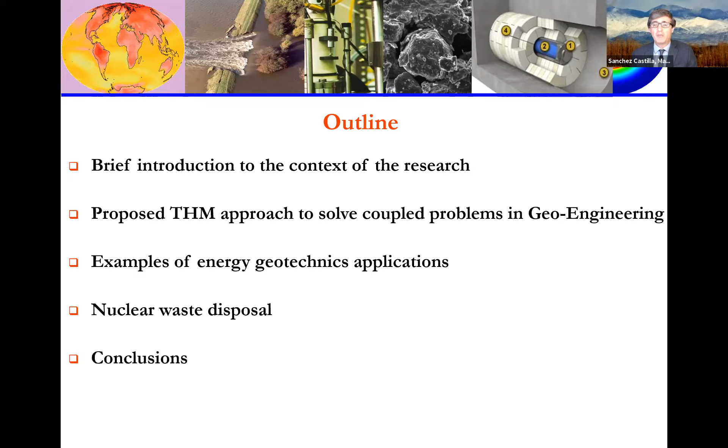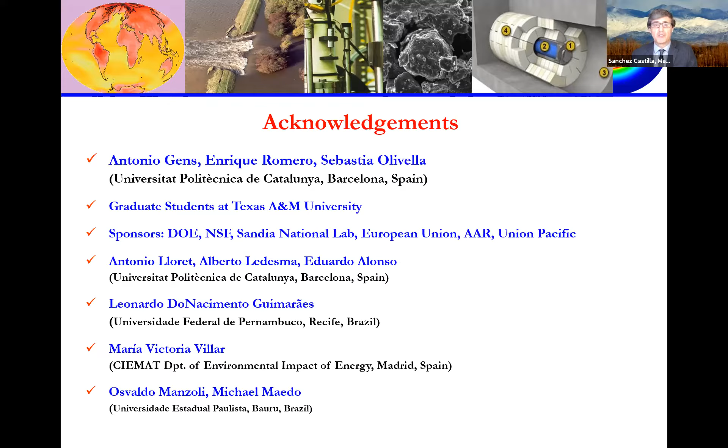Now, moving to the topic of the research, as you might know, the study of soil and rock under complex and extreme conditions involving mechanical, hydraulic, thermal, and chemical coupled actions has received increasing attention in the last few years. Some of these actions are unprecedented, so we are really facing new discoveries and learning more about the behavior of soil and rock.

The motivation can come from different applications. One of them is geoenvironmental engineering. As you know, we use soils and rocks to store waste and pollutant material. A typical example, and perhaps one of the most difficult ones we face, one of the challenges in our area, is the design of nuclear waste disposal.

In this kind of problem, what we are trying to do - I say trying because it's an unresolved problem, nobody has solved this problem yet. There is no country on the planet that has solved the problem of safe storage of nuclear waste. The idea is to go 500 meters or more below ground level and construct a system of galleries, which you can see here. This is a zoom of what we anticipate doing there.

Basically we have the canister that contains the highly polluted nuclear waste. Generally there's an open space between the canister with the nuclear waste and the rock gallery. This space is filled by what we call an engineered barrier, and we are looking at clay, compacted expansive clays, to construct this barrier.

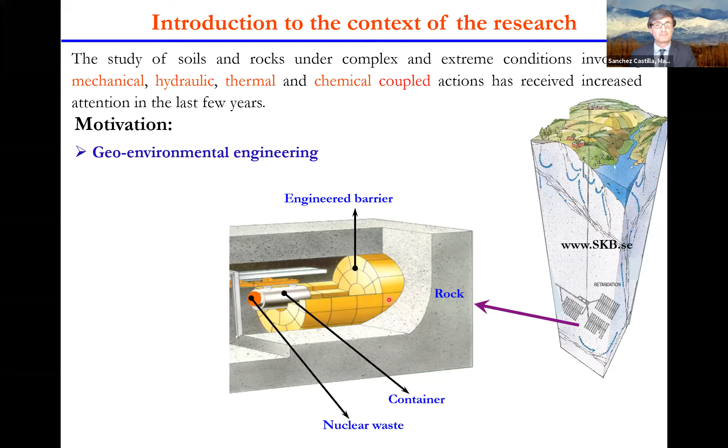One problem is that generally when we have this geothermal resource, we don't have an aquifer. You can see here a map of the United States, and where we have very nice geothermal resource, we have what we call dry rock. So there's no water there, just a very low permeability material. So what we are investigating is how we can induce a system of fractures in this dry rock, circulate water, and produce energy from this hot water.

The idea basically is to have two or more wells. One of them will be the injection well, in which we plan to inject cold water or another fluid, for example liquid nitrogen that can go to a temperature as low as -196 Celsius, about -320 Fahrenheit. And then the thermal shock that happens when this cold fluid is in contact with this hot rock, which can be at 200 Celsius, will induce a system of fractures.

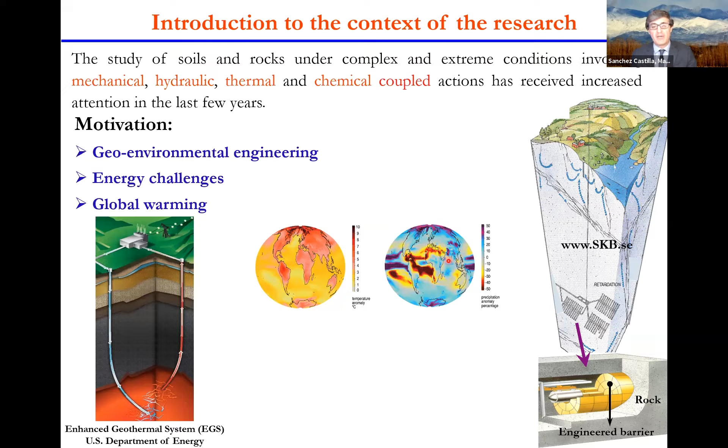When we look at precipitation, we anticipate more precipitation in the poles and more dry conditions near the tropics. This implies that we have higher temperature and higher change in relative humidity impacting our natural soils. Soil tends to crack when we have this variation of relative humidity and temperature.

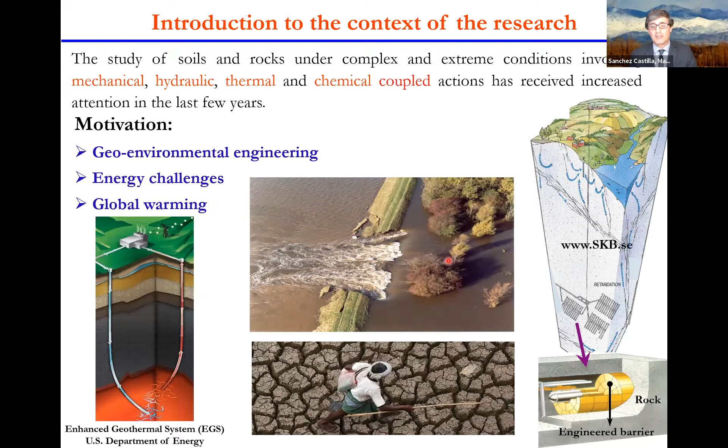This will affect our natural soil and also infrastructure like levees and similar structures that we have constructed during the last few years. So we also need to investigate this problem. As you can imagine, this is a coupled thermo-hydromechanical problem. We have several problems, and these are just some examples in which we see this need to have a good understanding of these coupled thermo-hydromechanical and chemical processes in soils and rocks.

When we're looking at the thermal problem, the main aim is to understand how the heat will be transferred in this porous medium. When we look at the hydraulic problem, it's how the water and gas will flow through this interconnected porous space that we have in our soils and rocks.

And we'll look at the stresses. The mechanical problem's main goal is to see how we transfer these stresses between the particles that we have in our porous medium, and how this stress-strain behavior of the soil impacts settlements and other important aspects.

For example, you know that the fluid density and viscosity depend on temperature. So if we have a thermo-hydromechanical problem, we know that the temperature will impact the hydraulic problem.

You also know that the flow of water and gas in soils depends on permeability, and the permeability depends on porosity. So if we have a change in the mechanical problem that will impact the porosity of our porous medium, we will see that this will impact directly on the hydraulic problem.

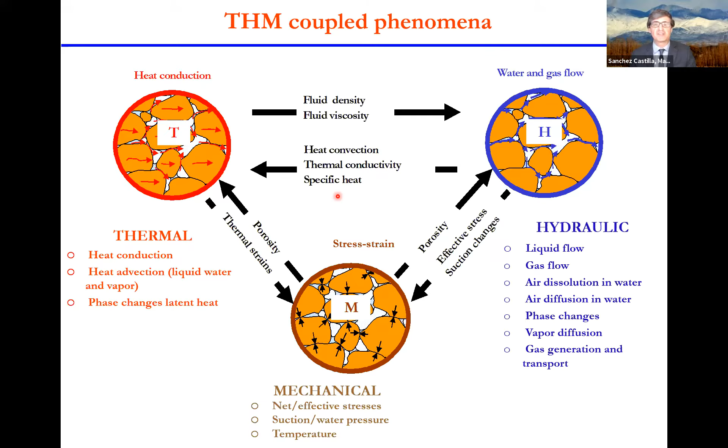Now, a very general slide about how we approach this kind of problem. I will try to present different examples of these different components in this presentation.

As you know, in engineering it's very important to understand the real problem, to have a good understanding of the materials, boundary conditions, and the step of load that we are going to have in our problem, so we can then identify which are the relevant phenomena we need to consider in the analysis.

We need to write this relevant phenomena in mathematical form, because finally, we are engineers and we need to solve the problem. For that we need numerical tools and analytical tools that allow us to predict how this system is going to work under different conditions.

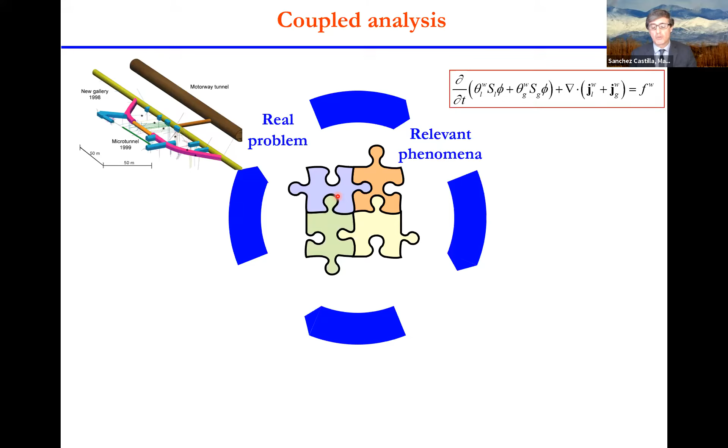But we also need to go to the lab, because we need to study under controlled conditions in the lab by looking at changing temperature, pressures, or mechanical effects, how our materials react, so we can develop what we call the constitutive models of our materials.

When we have this information, we should incorporate all of it into what we call a numerical model. The numerical model basically allows us to incorporate all the information that we have of the problem into a single component.

So there we need to know very well the geometry, we need to define the boundary condition, we need to define the different materials, the different steps of load that we have, the different thermal or hydraulic action that we are anticipating. And then what we do generally is compare this model prediction with tests that we have from the field.

And if we are confident that our model is doing well, if we feel that the model managed to predict the main patterns of behavior that we observe in the actual problem, we can use this code to do the engineering of the problem, to design and so on.

But sometimes we have a problem and our model is not able to properly predict the behavior that we see in the real system. So what we need to do is revisit our formulation. Perhaps we are missing some important components, some physics that is relevant for this particular problem, or perhaps we need to go again to the lab to see which additional tests we need to do, because there is something of the material we are studying that we don't understand well, and we need to incorporate that in our model, then run again, compare, and see how confident we are about our model.

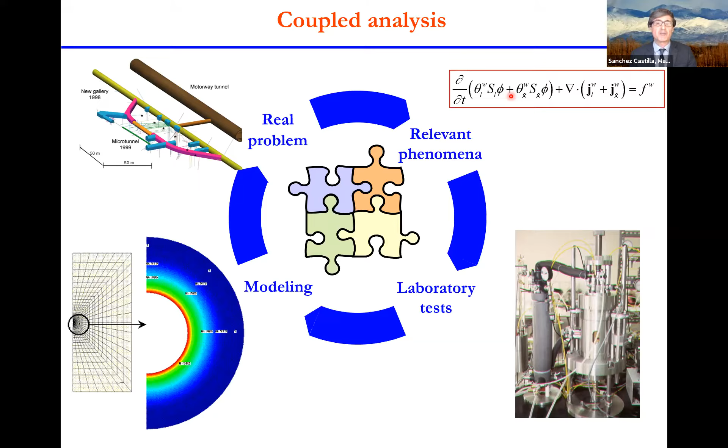So now I will move very quickly to the formulation that we are using. It's a quite standard formulation in which we have a system based on a basic porous system. In this case, we have our particles with a porous space.

And we assume that in the porous space we can have two different fluids - in this case it can be more, obviously, but in this case it's gas and liquid. And what we are doing is basically establishing different kinds of equations. One of them is what we call the mass balance equation.

This is the example of the mass balance of water. In this equation, what we are doing is basically looking at all the water we have in the system, and looking at the water that is coming in and coming out. Basically what we are saying is that any variation of the storage of this water in the system, plus the net flux of water - the difference between the water coming in and coming out - has to be equal to any external sink or source of water.

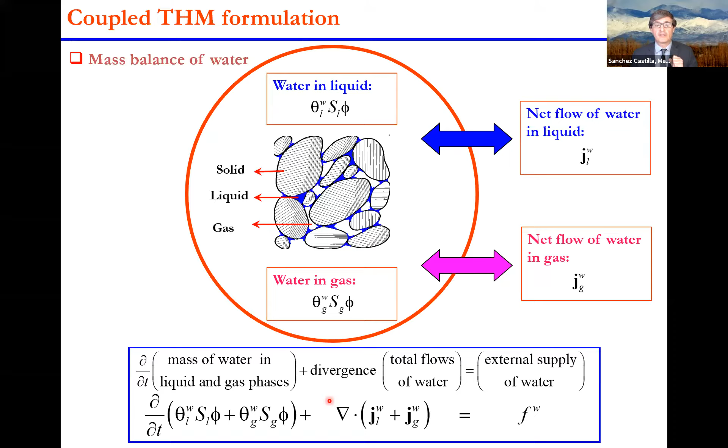So we have this mass balance equation for the different species. We are working with a multi-phase, multi-species formulation. Basically we are considering 3 different phases: solid, liquid, and gas, and 3 different species: mineral, water, and air. So in this initial basic formulation, we consider that the solid has only 1 mineral.

Obviously we can consider a more complex situation. We consider that in the liquid phase we have 2 main species: the liquid water, and the air dissolved. We assume that we can have air dissolved in our liquid phase.

As for the gas phase, we have 2 main components: one is the mixture of dry air - we assume we have only this dry air - plus the vapor, water vapor. So nitrogen, oxygen, and all other gases that we have in our gas phase are considered just 1 gas, the dry air, plus the water that we have in the gas phase in the form of vapor. So this is the basic formulation.

We have expanded that to consider other species and other phases, but this is the basic one. This formulation was proposed by Olivella in 1996, and then based on this equation, CODE_BRIGHT was developed - that is the code that we are working with.

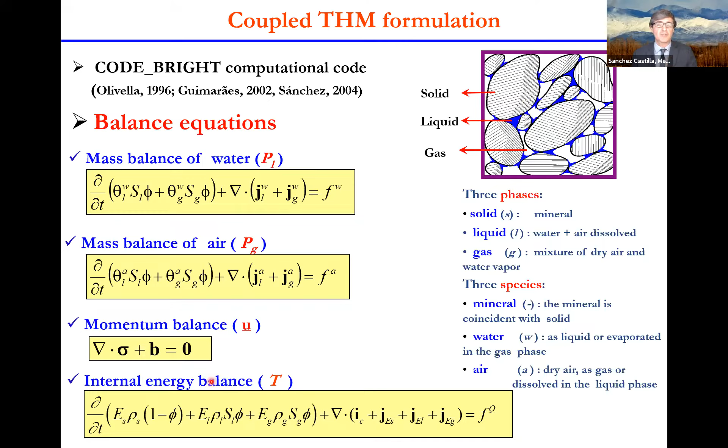So this is one set of equations, and we need to add to our formulation what we call the constitutive equations and the equilibrium restriction. In this set of equations, what we call constitutive equations are the relations related with the behavior of the material, the particular material we have in our system.

These basically relate dependent variables with the main variables. For example, Fourier law is used to calculate the conductive heat flux, and as you know, it depends on the thermal conductivity and the gradient of temperature. We use Darcy law for the flow problem, gas and liquid phase.

The retention curve is the equation that allows us to know the saturation of different species in our porous medium, liquid and gas. Fick's law is for non-advective fluxes. The mechanical model relates stresses with the strain.

And then we have equations for the phase density and another equation, like for the viscosity, that allow us to complete this set of constitutive equations.

Then we need to add 2 additional equations that we call the equilibrium restrictions, that basically allow us to know, for a given temperature and pressure condition, the amount of water we have in the gas phase, and the amount of air we have dissolved in the liquid phase.

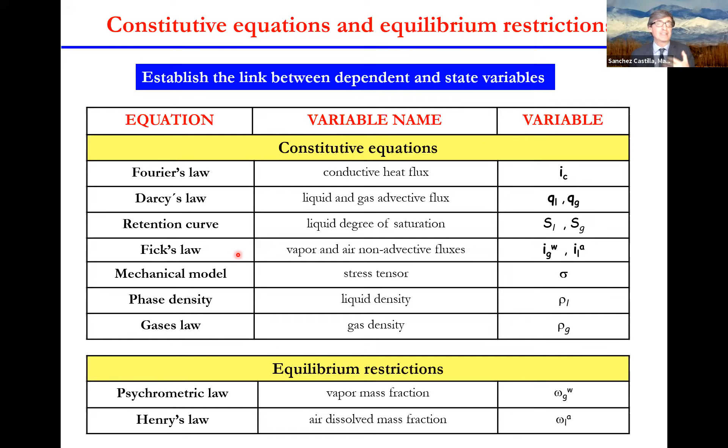So basically, with these basic equations, we have a full formulation that we can use to solve our problems. Before going to the problems, I'm going to show very quickly some typical forms of these constitutive equations that we need to determine generally from experiments in the lab.

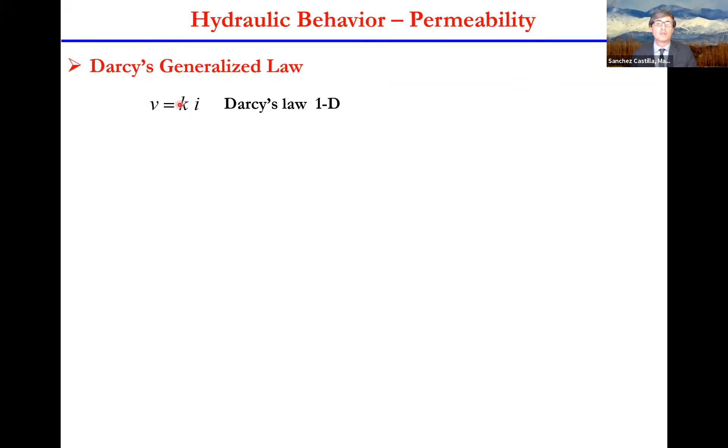As you know, Darcy law establishes a relation between the velocity of the water in the soil and the permeability with the hydraulic gradient. So this is the typical Darcy 1D equation that relates the velocity of the water with the soil permeability and the hydraulic gradient.

What we do in this kind of problem is we expand this basic equation to different phases. So we use, in this case, alpha to identify the liquid or the gas phase, and then we have a kind of...

generalized equation for the permeability that involves what we call the intrinsic permeability, which is a permeability that depends only on the porous structure of our porous medium, the viscosity of the fluid flowing through the porous medium, and the relative permeability. I'm going to explain that in a minute.

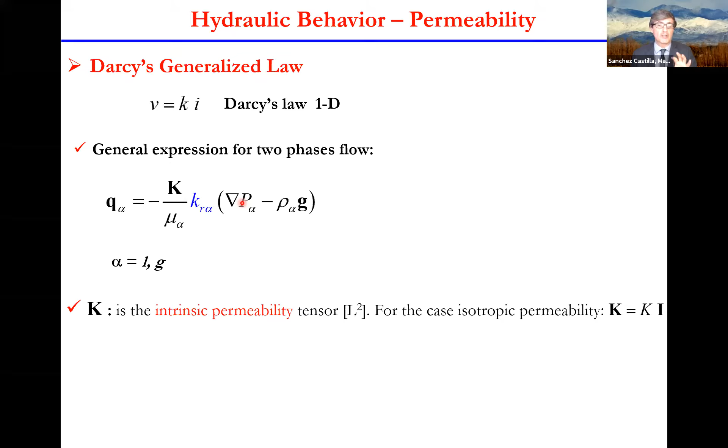Here we have, in terms of the hydraulic gradient, expressed in terms of the gradient of the pressure, liquid or gas pressure, depending if we are dealing with liquid or gas flow. So K is the intrinsic permeability tensor, as I mentioned before, depending only on the porous structure of our porous medium. And then we need to incorporate the viscosity of the fluid and other properties.

And this law here is what we call the relative permeability equation, that allows us to consider that when we have this two-phase problem, basically liquid and gas sharing the porous space, not all the voids in the porous medium are available for the flow of gas and liquid. We need to account for the impact of this partial saturation on our permeability law, which is basically a coefficient between 0 and 1 that allows us to estimate the permeability of the gas and liquid when we have this two-phase problem.

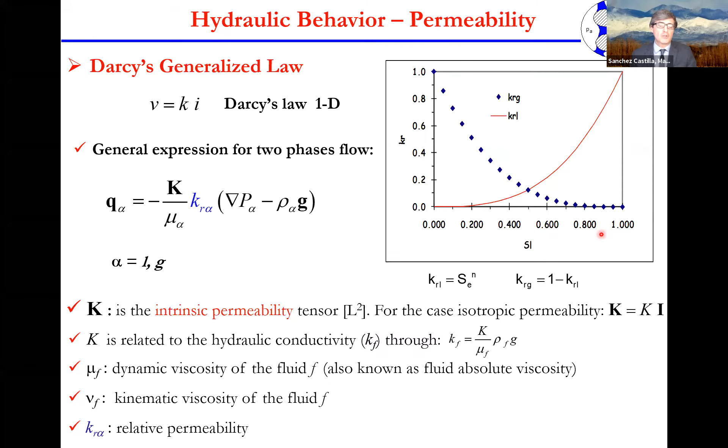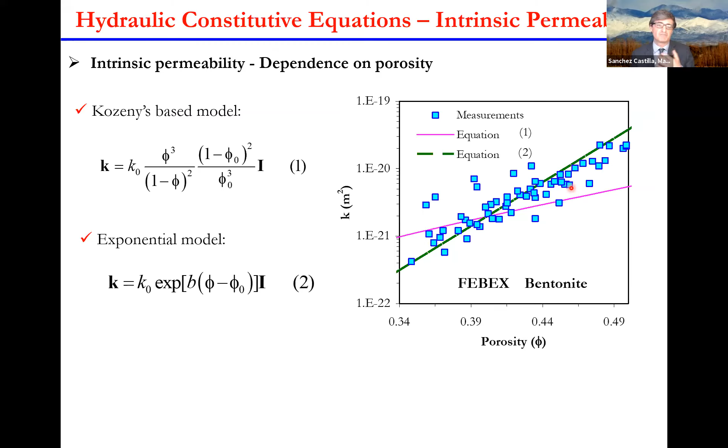These are relatively basic models, in which we use only porosity as a variable to update our permeability. We have also developed more sophisticated models based on the porous structure and pore size distribution that we can use if needed.

But I am presenting here the basic formulation for thermohydromechanical problems. In terms of thermal conductivity, the challenge here is that it's the typical Fourier law, but thermal conductivity doesn't depend on just one material, but on the different phases in our porous medium: the solid, the liquid, and the gas. So we need equations for thermal conductivity that account for the contribution of these different phases to the global thermal conductivity of our porous medium.

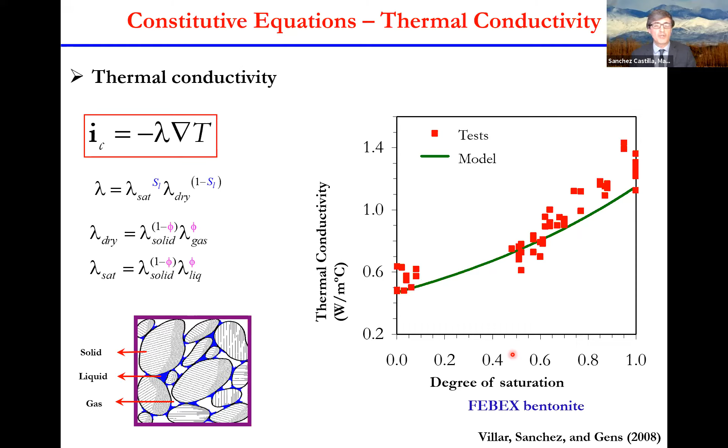And here, as always, we need to do our experiments in the lab to see how we can develop a thermal conductivity law that accounts for the effect of water saturation, porosity, and so on in our Fourier equation.

Then in terms of the mechanical model, this is perhaps the more complex component in this kind of system. Expansive clays are materials that have a complex behavior, so it's anticipated that the modeling of this kind of material will be quite complex. So we need to develop models that can reproduce that, and this implies that we need to develop generally what we call elastoplastic models to account for the effect of pressure, liquid and gas pressure, and temperature on the behavior of the bentonite.

So here you have a typical example of one of the materials that we are considering for the case of nuclear waste disposal. This is a compacted bentonite. The density of that can be quite high, 1.7 megagrams per cubic meter. And the idea is this is the rock, right?

The idea is to construct a barrier using this block around this canister, where we are going to place the canister containing the nuclear waste. So this is compacted material, and the basic model that we are proposing is based on CAM clay.

The CAM clay model, the modified CAM clay model, is very well known in geotechnical engineering. What we are doing here is expanding this CAM clay model to consider the effect of suction, which is the difference between the gas and the liquid pressure. We also call that capillary pressure, on the mechanical behavior of the soil.

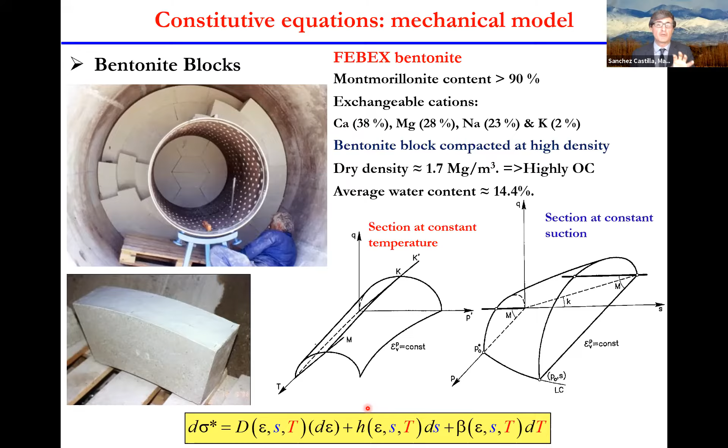So this is basically the formulation, and I wanted to show very quickly some of the quantitative models that we are using for this particular material we have here. What we need to do then is incorporate all of these equations in a computer code.

Here I am presenting CODE_BRIGHT, a coupled thermo-hydro-mechanical and chemical code that we are using to solve this kind of problems in geological media. So what you have here are these different components that I mentioned before: the mechanical problem, the flow problem, the thermal problem, and also the chemical problem. This code allows us to solve each one of these problems individually.

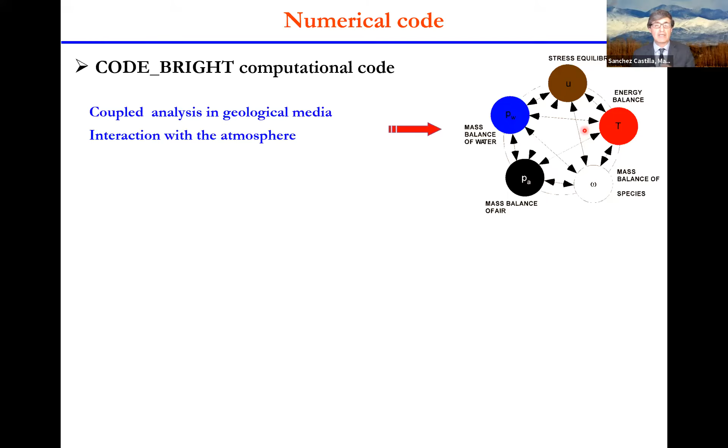We can be interested in only the mechanical and thermal problems, or we can also look at the interaction between these different physics to analyze these coupled thermo-hydromechanical problems. So it's a finite element code.

It's a kind of hybrid code. We use the Newton-Raphson method to solve the nonlinear system of equations, and we use finite difference to solve the time evolution problem. We also have the GID code, also developed in Barcelona, that allows us to prepare all the information needed to solve this kind of problem in terms of geometry, mesh, materials, and so on. We can also use this code for post-processing.

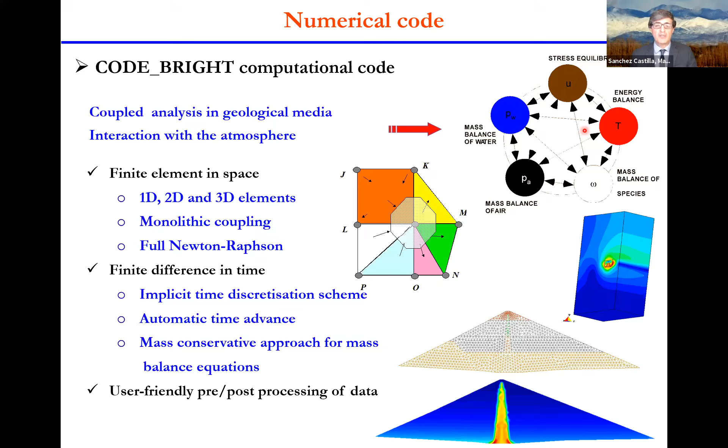So this is basically an introduction to the tool that we have been developing for several years to analyze this kind of problem in soils and rock. Let me go now very quickly to some applications we are interested in and working on at Texas A&M. I will divide these applications of energy geotechnics into three main categories.

One of them is the application related to energy production. We look at how we, as geotechnical engineers and geomechanics, can assist in producing energy. One typical problem is the production of oil and gas from a reservoir. What we do generally is try to enhance this oil and gas production by injecting fluid at high pressure in what we call the injection well. Basically, this fluid that we inject, which can be water or CO2, will push the gas or oil to the production well, so we can speed up the production process.

So what we try to do in this case, obviously, is inject the maximum pressure possible so we can produce this oil quickly. But we need to consider that we shouldn't compromise the geomechanical stability of the system.

One typical problem we have in this kind of application is the reactivation of faults. We have geological faults that are generally stable; they have been there for hundreds of thousands of years. But if we apply very high pressure, we might compromise the stability of this fault, and we might reactivate it, with the uncontrolled release of oil and gas through this fault.

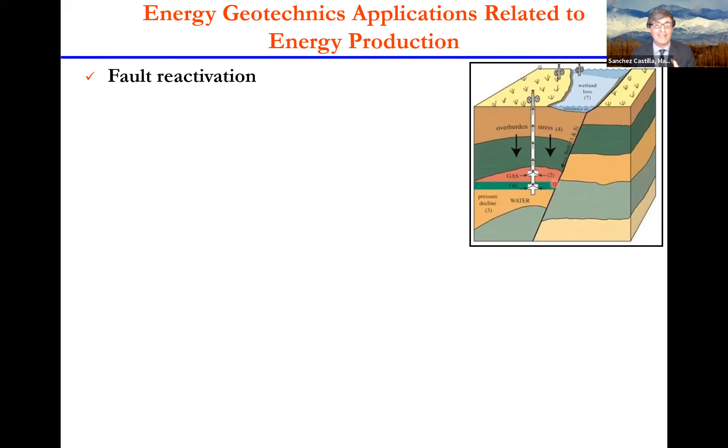The idea here is to see how we can produce oil and gas from what we call non-conventional reservoirs. These are shale reservoirs which have very low permeability, and we need to fracture this material in order to produce the gas that is trapped in this low porosity material.

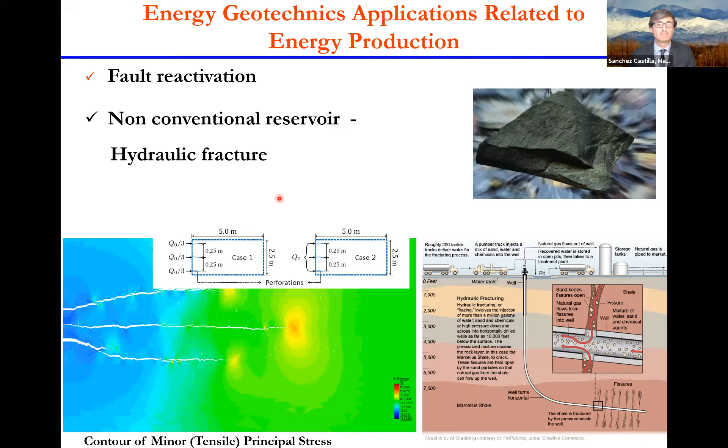So again, if you think of this problem and the previous one, what we are doing is injecting fluid at high pressure, perturbing the mechanical problem through this injection. This is also a very interesting problem, and we are working strongly on it because it's critical in terms of the energy resources available to us.

The last topic I am going to mention very quickly is methane hydrate. It's also related to energy production. We have a plenty amount of methane that is in the form of hydrate - a kind of ice structure, where methane and ice are in a crystal configuration in the ground. It's a solid compound, and here you have a picture of a sediment with hydrate - these whiter parts are the hydrate, and it is very stable.

When we have conditions of high pressure and low temperature, but if we change this condition, for example by drilling through this sediment, this hydrate dissociates. This implies that the hydrate, which is in the solid state, will dissociate, and the methane will move to the gas phase and the water to the liquid phase. When this happens, we have a huge change in volume. For example, 1 cubic meter of methane hydrate can produce 178 cubic meters of gas and 0.78 cubic meters of water.

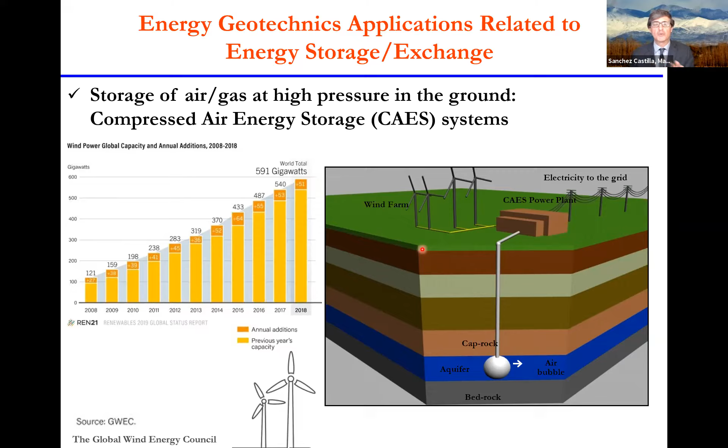I think I am running out of time, so I am going to skip this one, and I will move to the last one.

The last one is related to how in geotechnical engineering we deal with the waste produced in the nuclear energy sector, right?

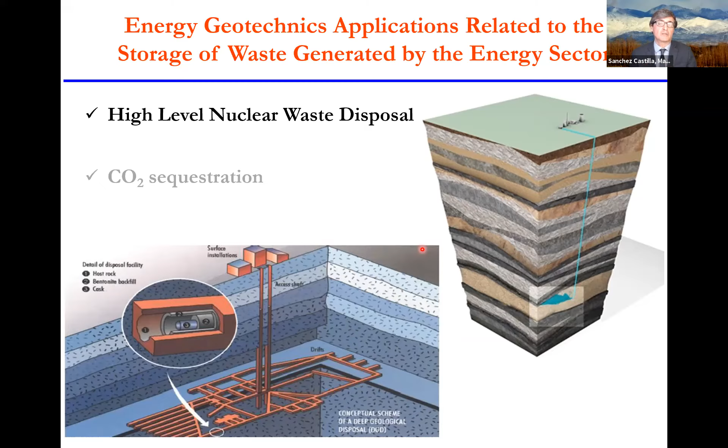And I already mentioned about high-level nuclear waste disposal. That is clearly a product of the nuclear production of energy. And we also need to deal with CO2, and there is a lot of projects related with CO2 sequestration. I am not going to talk about CO2 sequestration in this particular talk, but it's another important application that geotechnical and geomechanical engineers are working on nowadays.

So I will focus a little bit on high-level nuclear waste. I will use the last minute to present this particular problem.

As I mentioned before, the idea is to construct this system of galleries 500 meters or more below the ground level. This is again a kind of zoom of what we're expecting there, with the canister containing the nuclear waste, the natural rock, and the clay barrier filling the space.

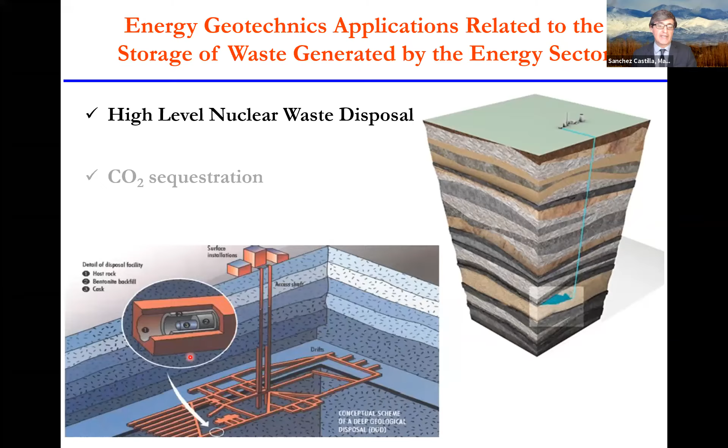In the next slide, you are going to see a cut of this section here. So this is basically our nuclear waste, this is the rock, and this is the compacted bentonite. So what we are anticipating here is that we have this heat emitted from the nuclear waste that will dry out the clay around it, it will shrink, and basically we have a reduction of porosity and permeability near the nuclear waste.

On the other hand, we have this water, this hydration that comes from the external rock, and will hydrate and induce this clay barrier to expand and swell in the external part. So we need to predict the time necessary for this water to hydrate the barrier and eventually arrive at the nuclear waste, right? So we need to understand very well how permeability evolves and changes within this process.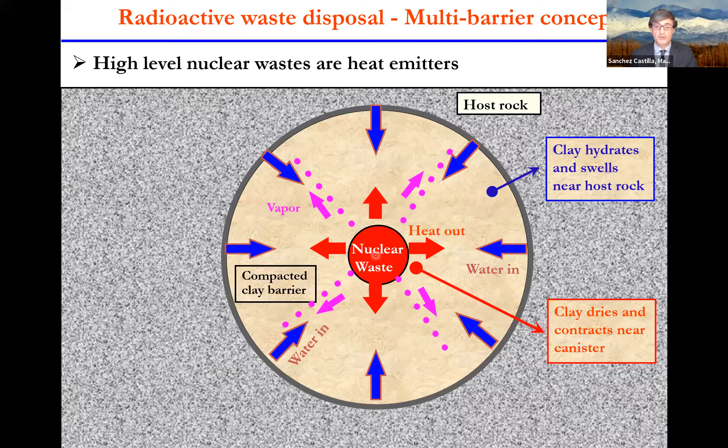And this is why it's important to understand how all of these thermo-hydromechanical processes work together, right? And obviously, as I mentioned before, we have chemical effects, because we are expecting chemical interaction between the clay that we are placing there and the rock that is hydrating the clay, right?

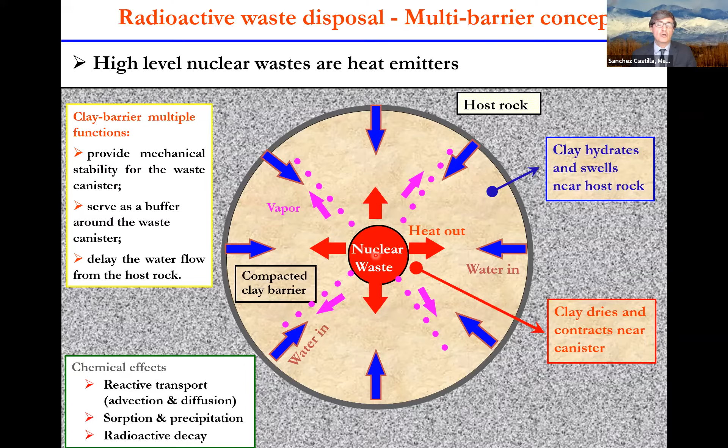So there are interests in this problem. As I mentioned before, we didn't solve this problem yet. We are working on that, and there are different laboratories in the United States and also in Europe. Perhaps Europe is a little bit ahead of us in terms of this kind of investigation.

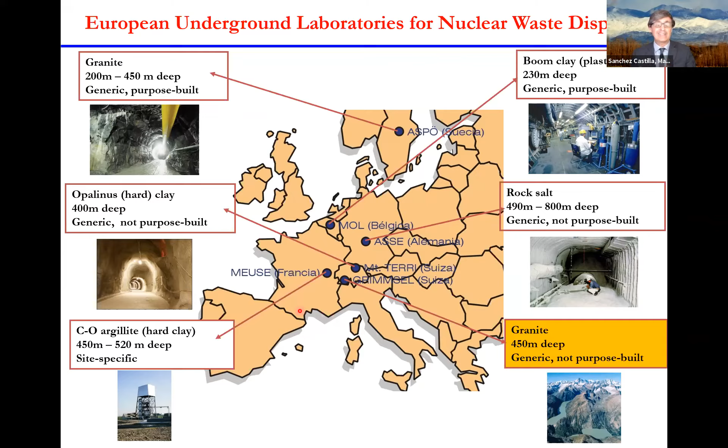And here you have laboratories in different kinds of rock, because we are looking at different possibilities. It might be granite, a candidate for that. It can be rock salt, or it can be clay stone. We have different laboratories in which we are running experiments to understand how this kind of system works under real operational conditions. This is an example of the typical design.

We can have either a vertical borehole, in which we place the canister, and fill this space with a clay barrier. We can also use a horizontal drift to place the canister.

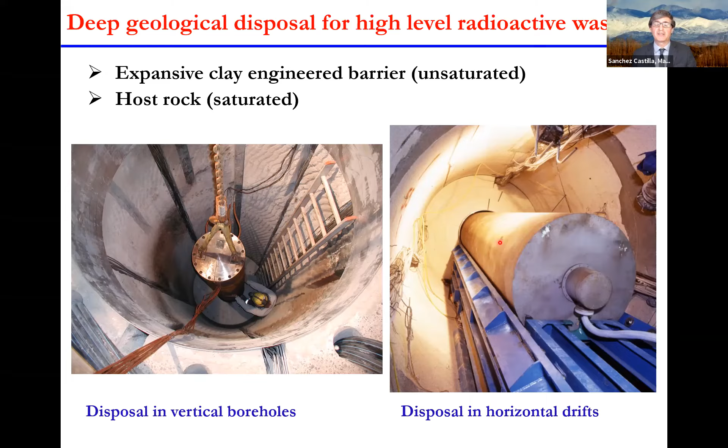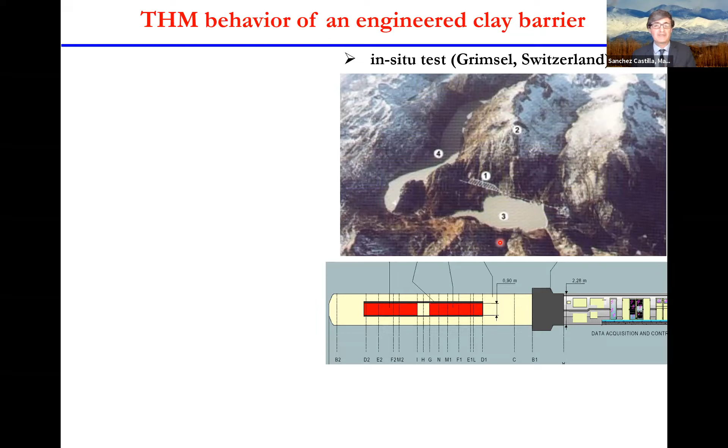I am going to talk about one particular project, the FEBEX project. This was called the Spanish project, mainly funded by Spain, but also by other countries in Europe through the European Union. In this project we have two main experiments: one in Switzerland that just finished two years ago, at actual scale and actual boundary and operational conditions, and a mock-up test of the same size as the real test in Grimsel, but in this case in the lab, where we control the hydration.

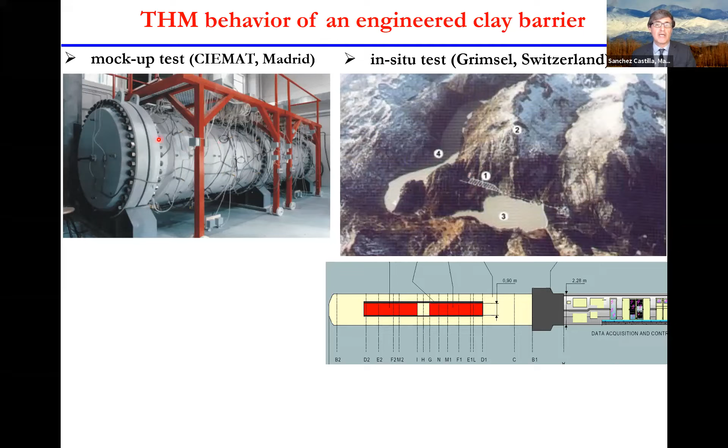If you think about this problem in the rock, we don't know the amount of water coming to the barrier, because it's a natural system. So we wanted to control that, and this is the test that is still ongoing in Madrid.

This is what I mentioned before, the clay barrier with heating. We are not using nuclear waste, we're using heaters to provide the thermal load, and the maximum temperature is 100 Celsius.

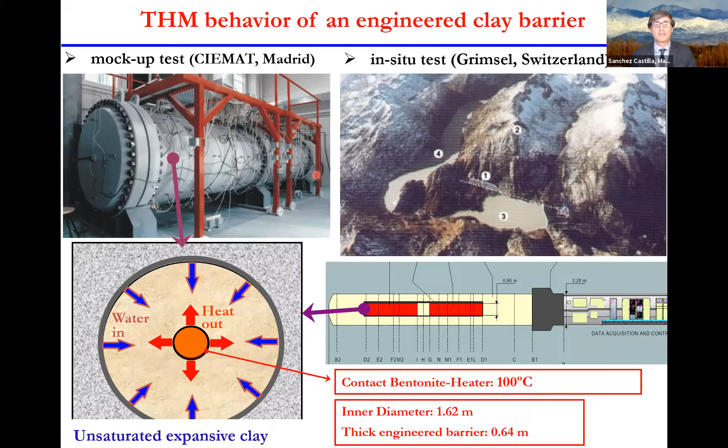This is a quite big experiment. The diameter of the barrier is 1.62 meters, and it's about 17 meters long. This is another view of the experiment.

The clay barrier is this yellow part. This is a concrete plug that isolates the heater from the rest of the gallery, in which we have all the instruments that allow us to track the evolution of the system.

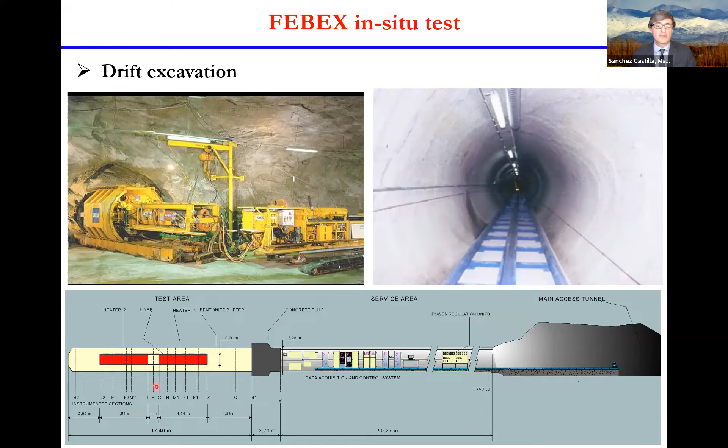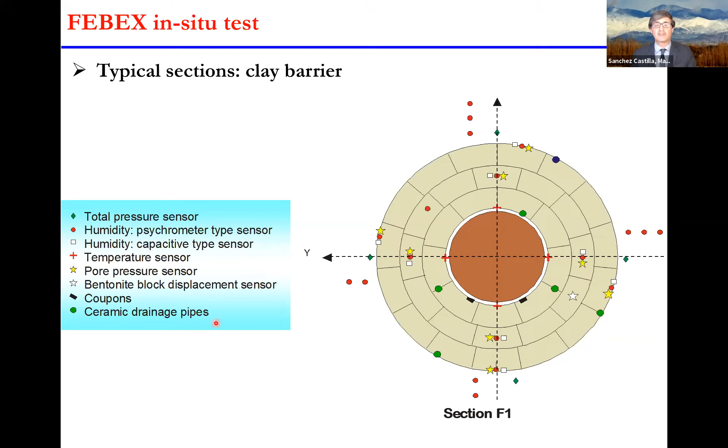This vertical black line corresponds to instrumented sections, in which we have sensors of different types. We measure stresses, liquid and gas pressure, relative humidity, temperature, and other variables. These are the typical locations of the sensors in these different sections.

We also have boreholes around the gallery. So this is the gallery, and this is the concrete plug. These boreholes around the gallery help us understand the thermal, mechanical, and hydraulic field around it.

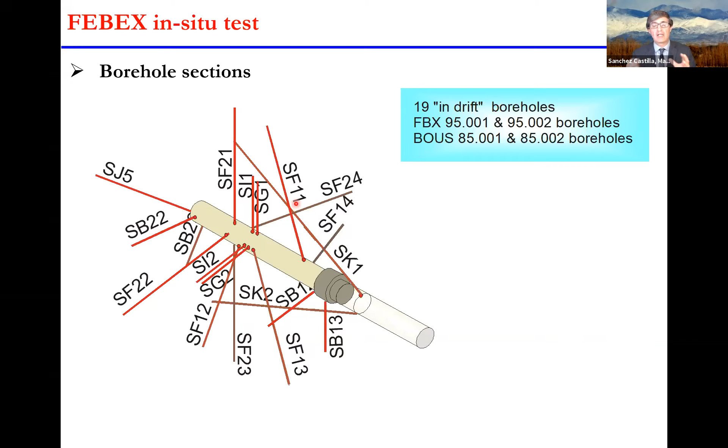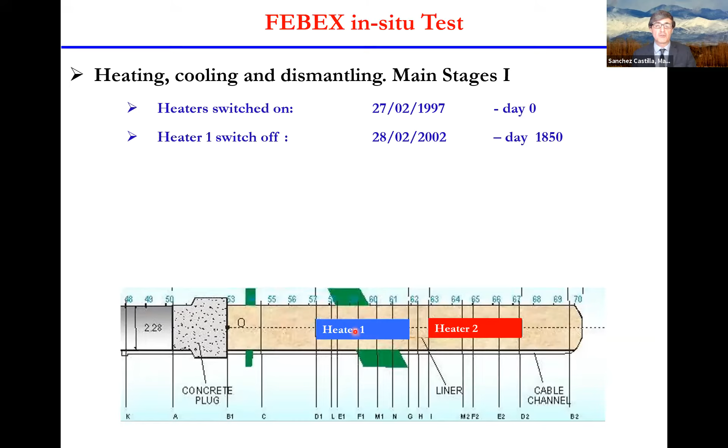The experiment ran for around 18 years, with two main stages, starting in 1997. After 5 years of heating and hydration, they decided to switch off heater one, and we dismantled the first part of the experiment. Then the experiment continued for another 13 years, until 2015, when it finished.

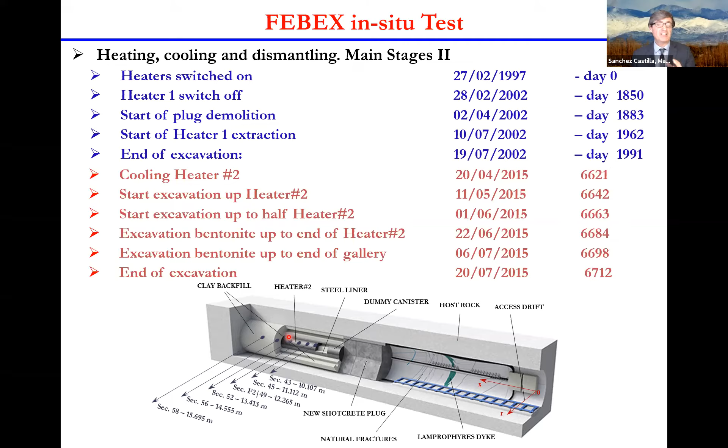So this is the layout of the second part of the experiment with only one heater ongoing. It's a very nice experiment, the longest one we have had in this type of project.

Here are some results of this project. This is the barrier I mentioned before, with compacted blocks of compacted bentonite. You can see there are some gaps between the blocks at the beginning of the experiment. This is the heater, and this is the granite, the gallery rock.

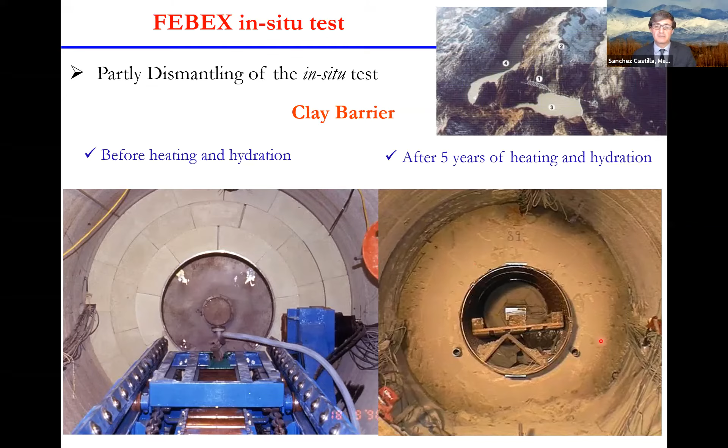Here you have the barrier 5 years after the experiment, and you can see it is more or less homogeneous. All of these gaps were closed, and the barrier is mainly hydrated from the external part of it.

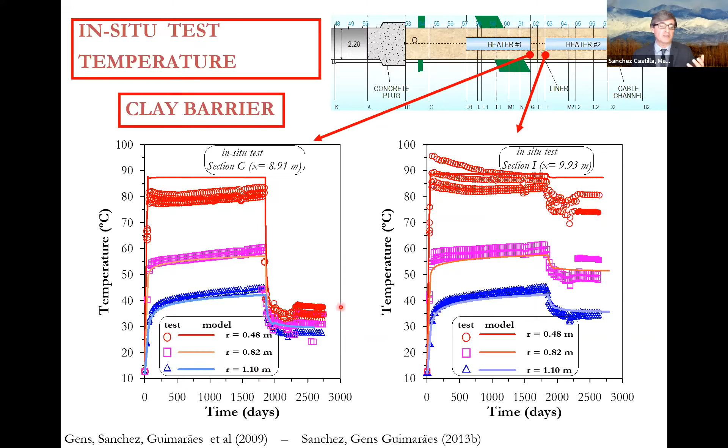Close to the heater, we have a high temperature as expected, about 80 to 90 degrees. Near the external contact with the gallery it's around 40 Celsius, and in between at the central part of the gallery. So this is all the results in terms of stresses.

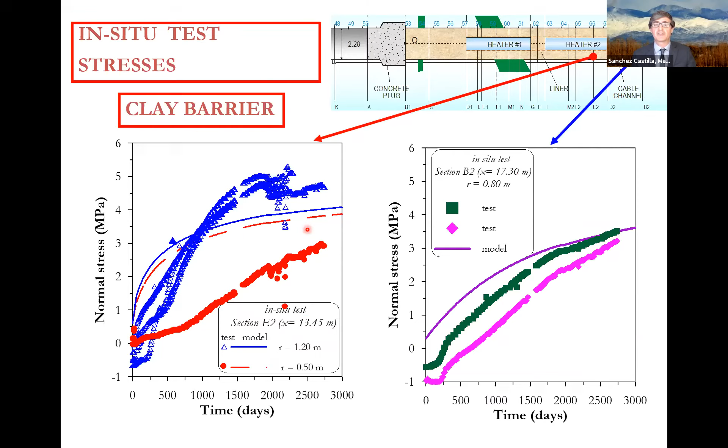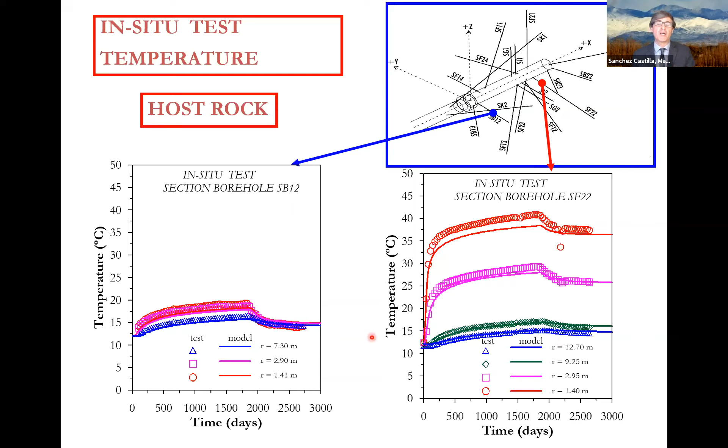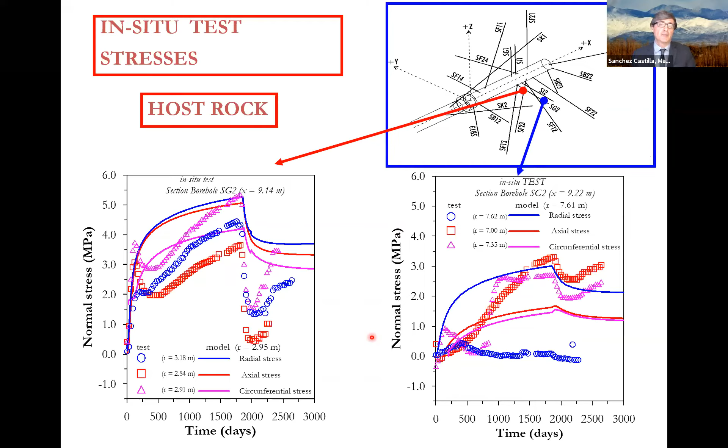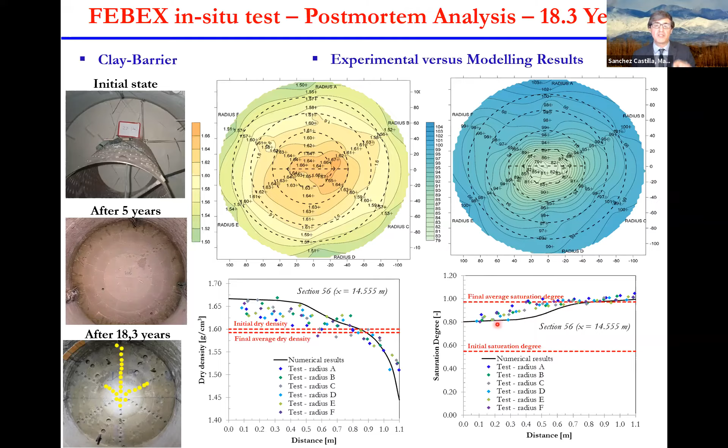These are the same results, but now plotted in a different manner. Here is what happened near the rock, this is close to the canister, this is as we move away, and this is near the rock. So we have a change in dry density, with a very high density near the canister because of the drying, and very low density because of the expansion and swelling of the bentonite near the rock. In terms of saturation, at the end of the experiment it's almost fully saturated, but the final part close to the heater is still unsaturated.

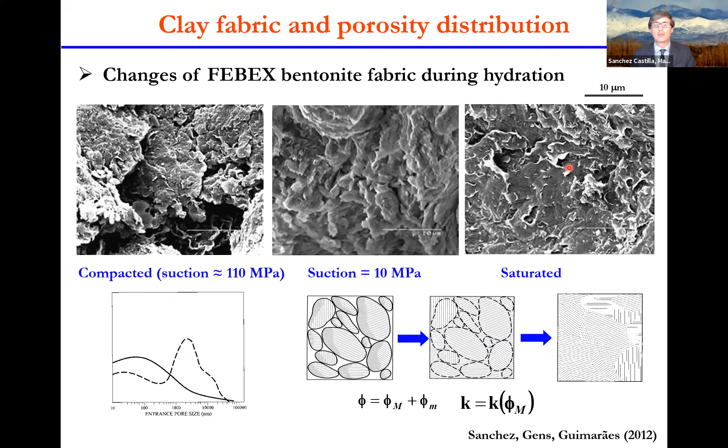I think I am running out of time. I just want to show some examples of other things we are investigating about this complex clay structure, and how we can incorporate this complexity into our model to account better for some aspects that we observe in this experiment that the simple single porosity model cannot capture. So this is a topic we are working on: how hydration impacts this dynamic structure of the clay during hydration, and how this impacts the behavior of this material.

Now we are also working on a project for the Department of Energy, looking mainly at gas migration in this kind of system. This is the project. We have 4 students working on this project, and we have a collaboration from Spain mainly helping us with that.

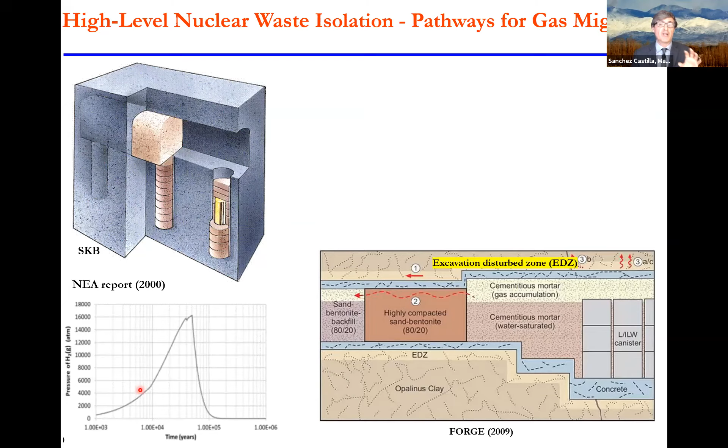The idea here is that the different metallic components of this system will oxidate, the gas pressure will increase, and it can become very, very high gas pressure in the system. So we are looking at this breakthrough of the gas through the clay, and preferential pathways for the gas through this barrier system. We are working on that, and we are now in the second year of the project.

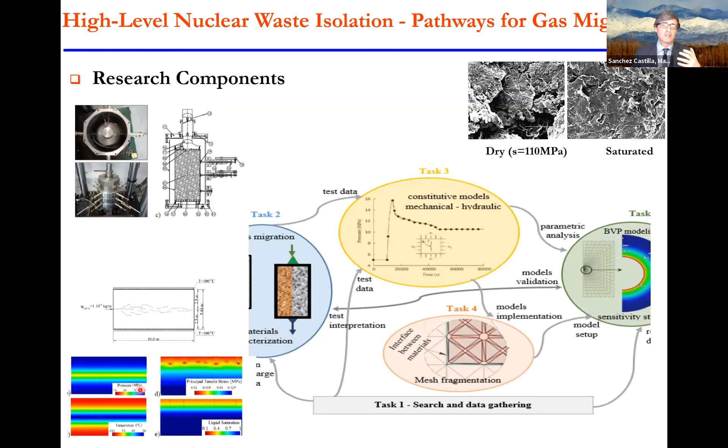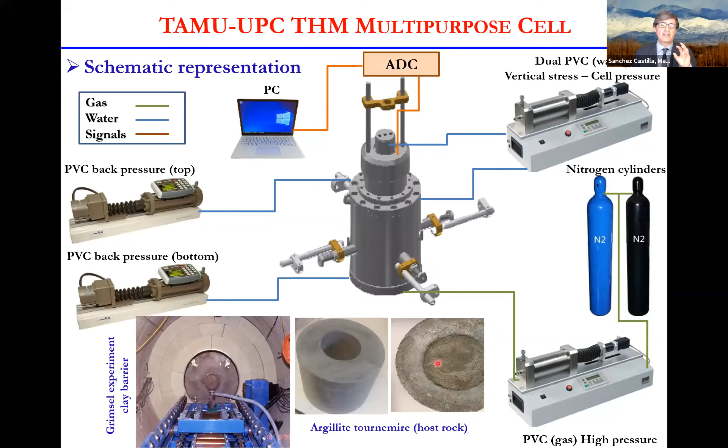We are developing a new testing device for looking at this gas migration problem in bentonite, and we are also developing our code to account for this problem. This is some of the devices we have developed in this project that allow us to test in the lab a prototype of the clay barrier, in which we can actually introduce a rock into our system along with the clay barrier, and simulate how gas will migrate through the contact between the clay and the rock.

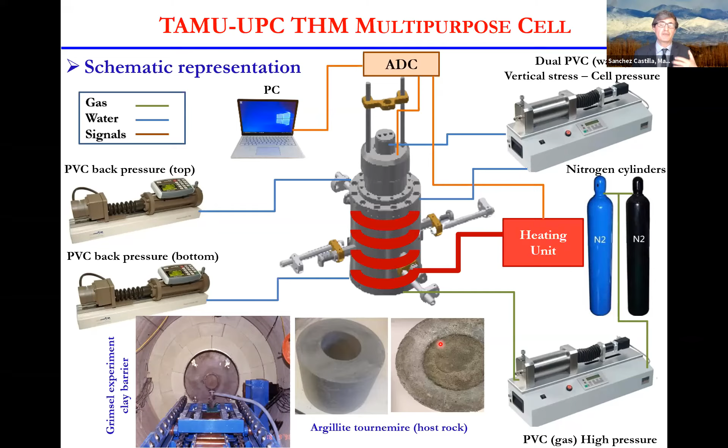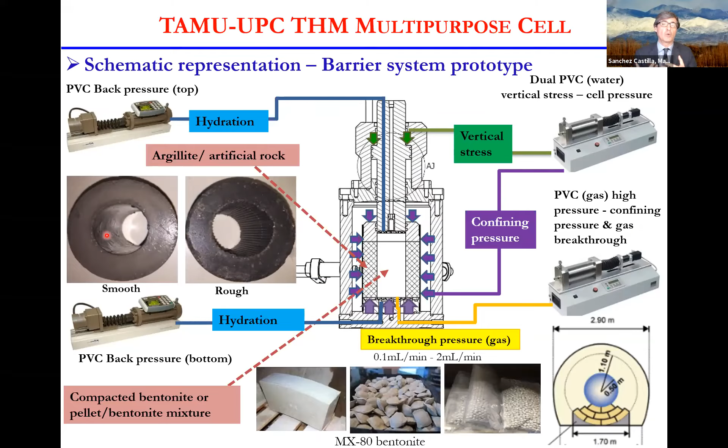We can also induce a thermal field to see what happens when we change the temperature in the system. We are looking at different kinds of interfaces to see how the rugosity of the rock wall will impact this gas migration. And we are following different protocols to understand better how gas will migrate in this kind of system.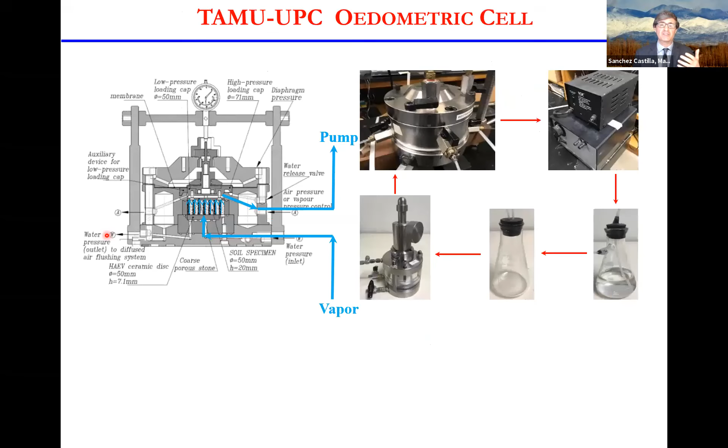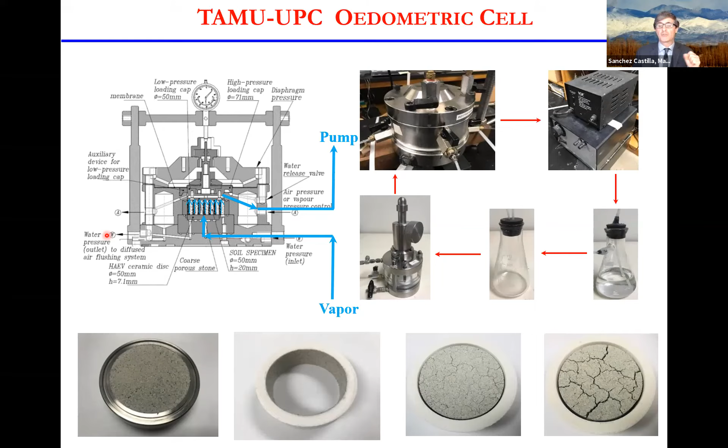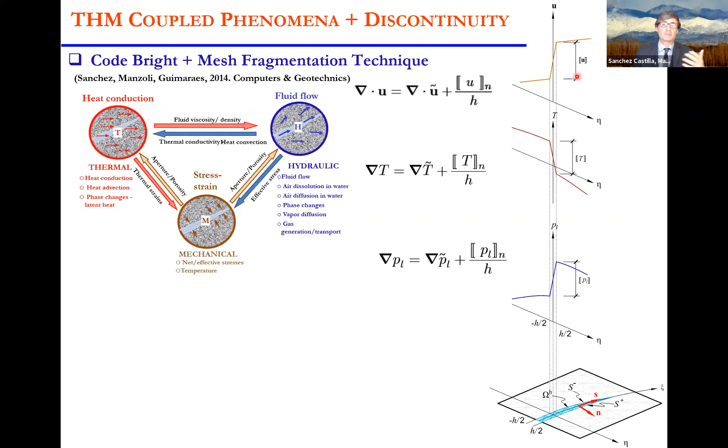We also anticipate that the bentonite might dry and open cracks, so we are looking at whether this is a possible scenario, and in that case, how gas will migrate through this cracked soil. We also developed and upgraded our code to account now for this jump in displacement, temperature, and hydraulic field, so we can account for the presence of discontinuity in our system. We are using this code to model this problem of gas breakthrough, opening of the fracture, and gas flow.

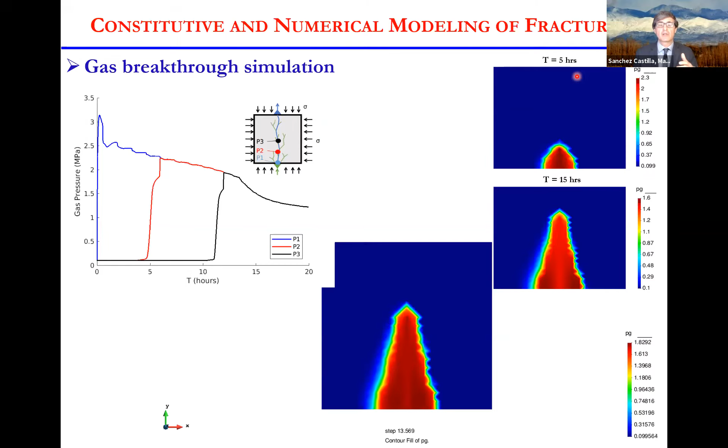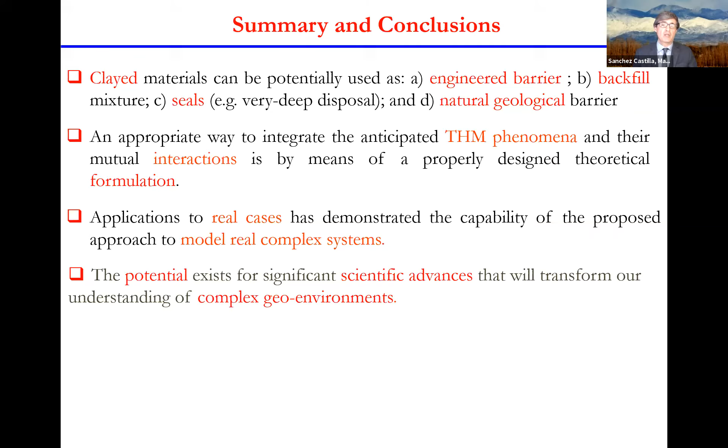So let me finish with some general conclusions. I focused mainly on this problem of nuclear waste disposal, looking at how we need to develop code and experimental devices to understand how the engineered barrier and also the natural geological barrier will work and behave when subject to changes of temperature, pressure, and high stresses. The interest is in this thermo-hydro-mechanical phenomenon and the interaction between the physics. I also showed some other cases in which we use similar tools for other problems related to energy technology.

We can see that we have the potential for significant advances in this complex area, because basically we are looking at the behavior of rock under unprecedented conditions of temperature, pressure, and mechanical conditions. So there are good opportunities here, especially for the students in this presentation. I think we have a lot of very nice things to investigate here, and energy geotechnics is a very nice area to dedicate research to.